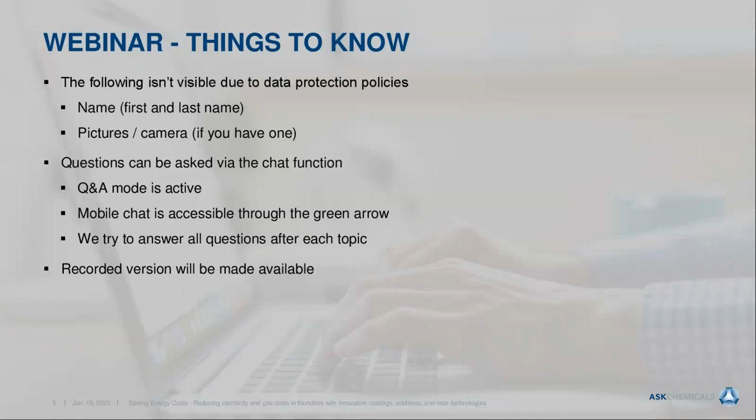A warm welcome from my side. We would like to structure the webinar in the following steps. First, I will tell you something about the rising energy costs and how energy is distributed. Then, how we can save energy in the coating process, followed by savings with additives. Later on, Imanol will tell you something about mini-risers and filters, and finally a conclusion.

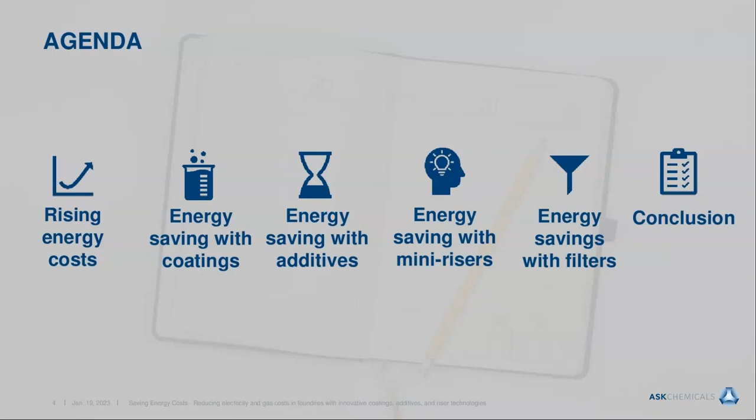What is the consumption of energy in foundries? Certainly, melting takes the majority of the energy. In iron and steel foundries, it's about 1,000 kilowatt hours per ton of molten metal. In steel foundries, we also have a big chunk of energy for heat treatment, which is about 500 kilowatt hours per ton. Furthermore, we have ladle heating, molding, fettling, etc.

In another literature, the total energy is reported split into electric power and gas. Iron foundries have a consumption of 900 kilowatt hours per ton electric power, whereas steel foundries have about 2,400. Gas consumption in iron foundries is about 40, whereas in steel foundries it's 10 times more, 350.

What about the core shop? For coating drying, when we have hot air convection ovens, we need a gas consumption of about 280 to almost 500 kilowatt hours per ton of sand cores, whereas if we have microwave drying, the electric power is only about 60 kilowatt hours per ton.

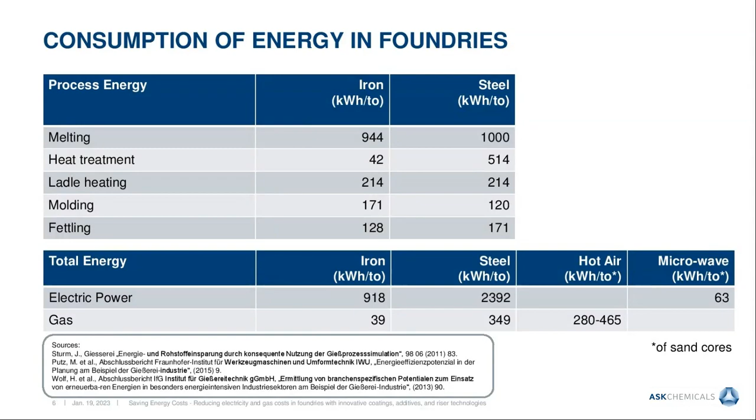What is the development of energy prices? If we look at electricity prices in Europe over the last 20 years, you can see that prices have continuously increased. But what is more frightening is really the gas prices, which exploded beginning in 2021, really through the roof. This is a big problem for all energy consuming industries, but especially, of course, for you as a foundry.

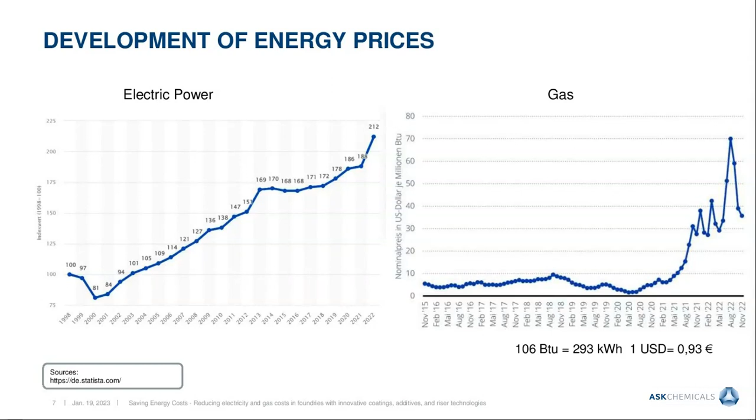But nevertheless, when a problem appears, typically the motivation and willpower increases to solve it, and there's light in the tunnel. There's a new process called ORC, Organic Rankine Cycle Process, where you can make use of your waste heat in the foundry. You have a heat exchanger where an organic component like ethanol is inside, heated up by waste heat from your melting shop or cooling station. This ethanol vapor pressure runs a turbine and produces electric power, with quite a high yield already of 17 to 20%.

So this is really good news, and the thermal yield is already at 60 to 70%. So you can make use of it for heating your buildings, running your drying oven, or even have a grid with your neighbors.

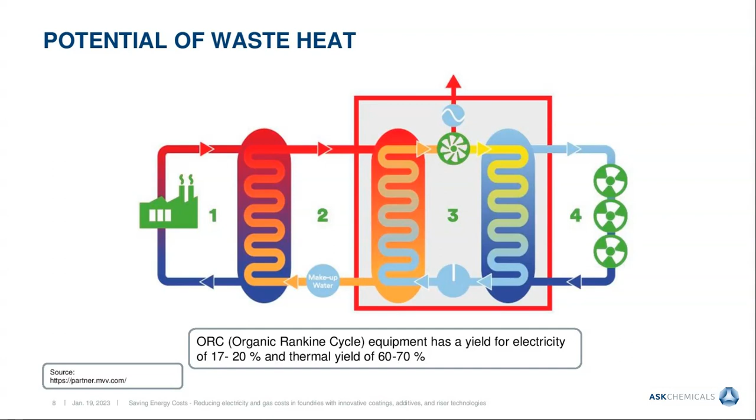What can we do in the coating drying process? The basic parameter for drying is definitely the sand type, which means the heat capacity and heat conductivity of the sand.

Furthermore, we have the coating solid content, which equals 100 minus water content. The higher the solid content, the less energy you need for drying. Also, the water retention of the coating matters: the less the water soaks into the sand, the less energy you need for drying.

Of course, the amount of applied coating is important, as well as drying temperature and time, air velocity and humidity, and the drying equipment, whether convection, microwave, infrared, vacuum, etc. We define performance as drying speed and energy cost per kilogram of coating, and this has to be optimized with the above parameters.

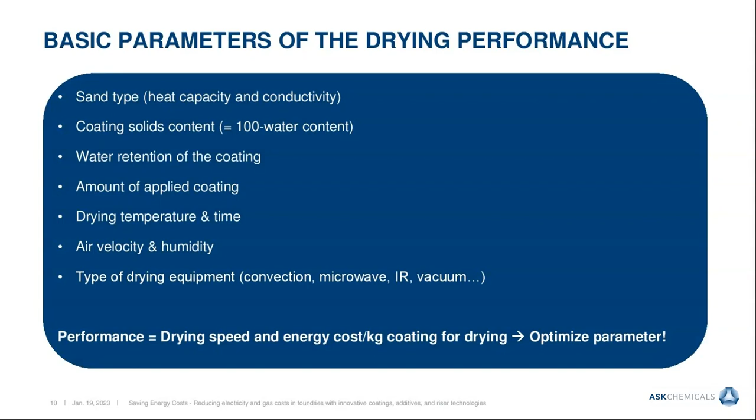How do we know that the coating is dry, which is very important for the casting result? There is equipment available typically used in the construction industry, for instance this Hydromette. We know that if the reading is below 40, the coating is good enough and dry enough.

Another possibility is to scratch off the coating after the drying oven, put this powder in a laboratory, and detect the remaining moisture with a drying balance.

There's another way, using a color-change moisture indicator. You see on the bottom left, the US coating, which is pink in the wet stage, changes to yellow when dry. So as soon as you have no more pink spots on your mold or core, you can be sure the coating is dry.

In Europe, we have a change from black to gray, which is also a very good indication.

However, you have to take caution. For instance, if you want to reduce your drying temperature to save energy, keep in mind that cold box resins often contain low volatile solvents, which then remain more in the core and may provoke gas defects. So in any case, prior to a decision, you have to do casting trials to avoid any trouble.

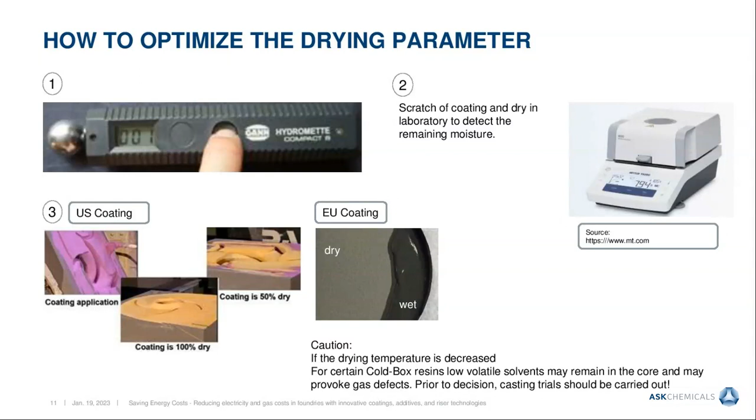Drying is a two-step process: heat exchange and mass transfer. Only as the water vapor is removed from the coating surface does drying continue and not stop. That means when you have low air humidity and high airspeed, the moisture is eliminated and you may be capable of reducing your drying temperature.

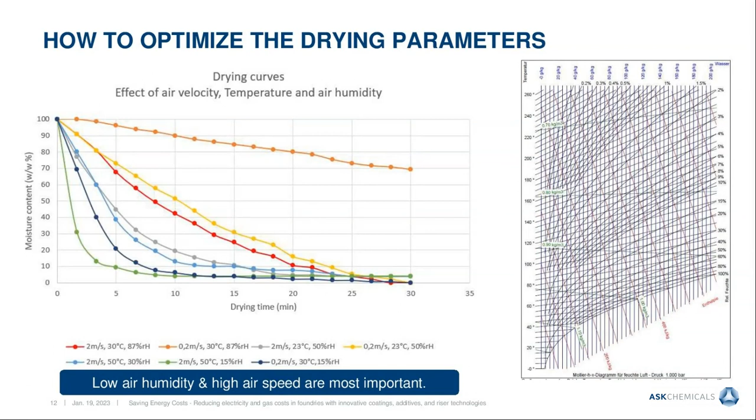On another part of the rotating desiccant wheel, hot air from waste sources like the melting shop or other sources is fed into the desiccant wheel, and the desiccant is reactivated. This has been shown to work really well.

We have an example of a foundry producing counterweights. They coat the mold with Solitec ST 801 at a temperature of 60 degrees with dehumidified air in only 20 minutes, and the heat, which comes from the melting shop, is for free.

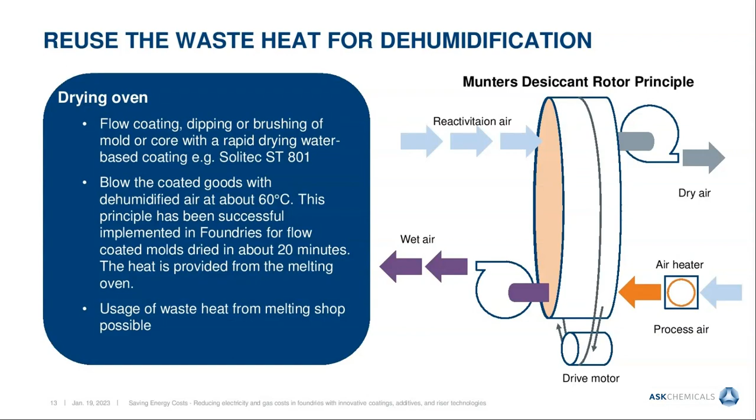This you can use to reduce, for instance, your drying temperature again and save energy, as already described. It has been proven that this fast-drying coating is even capable of substituting alcohol-based coatings in a drying oven.

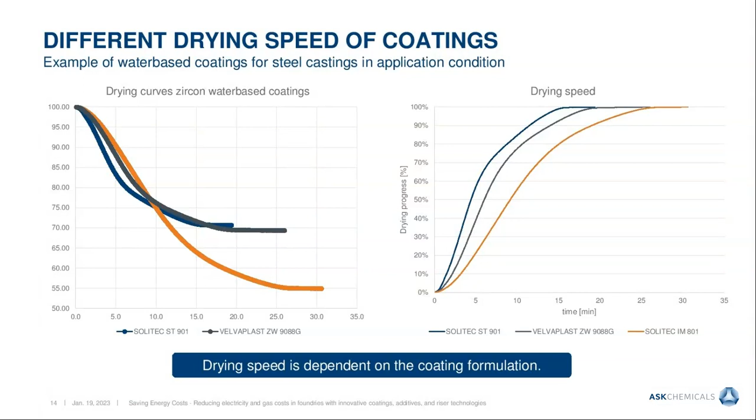What kind of different fast drying coatings do we have in our portfolio? On automotive iron castings, we have the Miratec TS520 and MB401. For inorganic binder systems, which are sensitive against water, we have the Miratec IBS 703. For iron No-Bake foundries, we have the Solitec HI 704 and WP 401. And for steel No-Bake castings, we have the already mentioned Solitec ST901 and the zircon-free ST801.

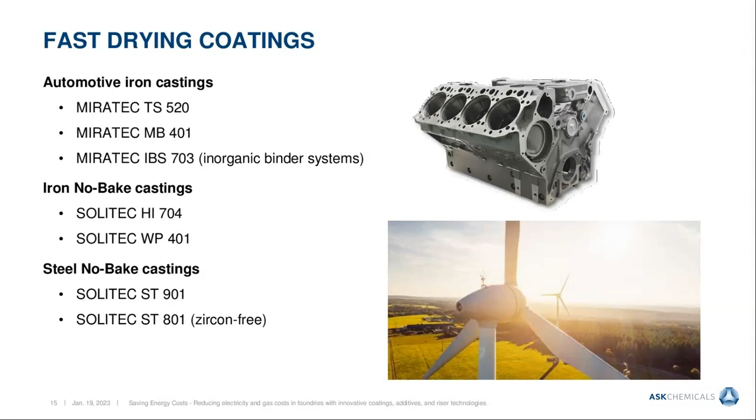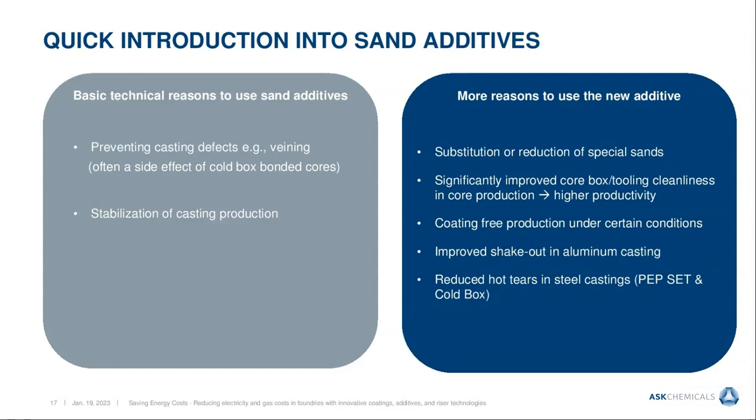What about eliminating the coating process in total? This we can do with sand additives. Typically, sand additives are used to prevent casting defects, for instance veining, which is often a side effect of cold box bonded cores, but also to stabilize the casting production in general. But there are more reasons for these novel additives. One of them is to have a coating-free production under certain conditions.

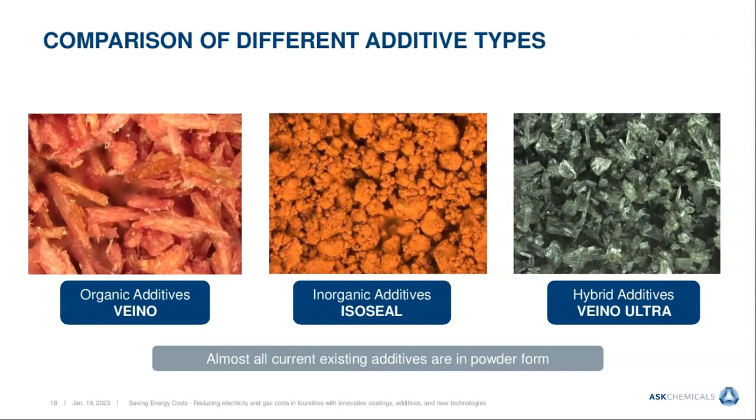There are different kinds of additives available: the organic ones, which we call Veino, the inorganic, which we call Isoseal, and the hybrid additives, which we call Veino Ultra. All of these have different feasibilities for application, some advantages, some challenges, also different addition rates. I would like to focus on the hybrid additives in this presentation.

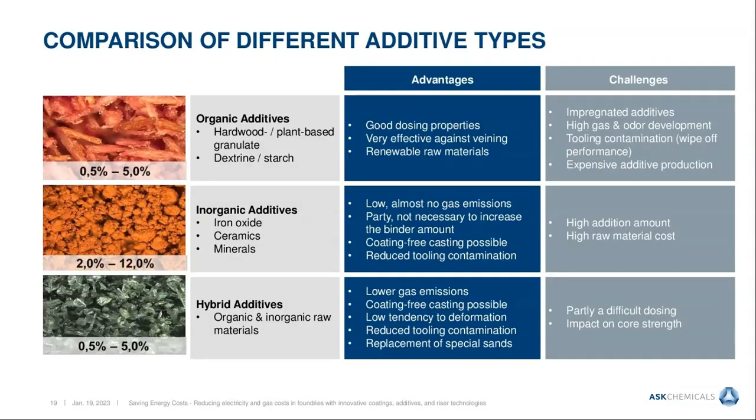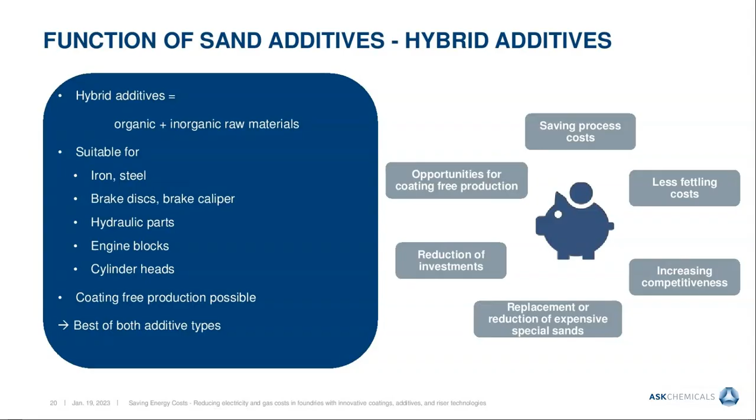Hybrid additives are a mixture of organic and inorganic raw materials, and they have a high cost saving in the process cost. They have the opportunity for coating-free production. By this, you can reduce your investments in maintaining or reinvesting in drying equipment, and you have the additional effect that you can replace or reduce expensive special sands. They are suitable for iron and steel castings, especially for brake disc, brake caliper, hydraulic parts, engine blocks, and cylinder heads. And I would like to show you now an example.

This is a ductile iron casting, a wheel part of a truck, originally coated, and we could eliminate the coating process by implementing the additive Veino Ultra. And even on gray iron casting, we were capable of showing that this concept works. Here's a housing of gray iron grade 250 with 120 kilogram weight, originally coated, and now the coating process has been eliminated by the additive EP4874.

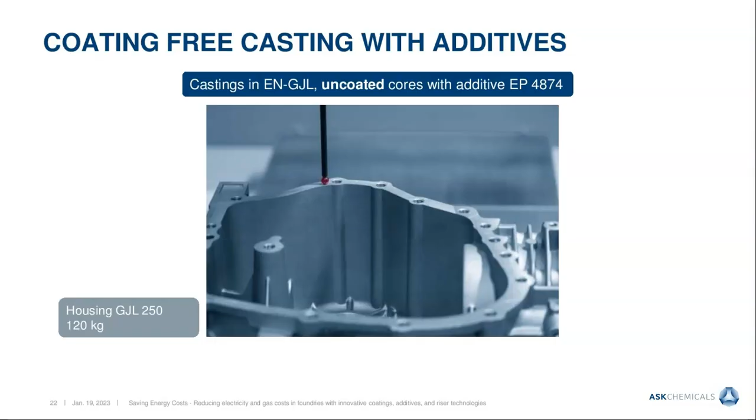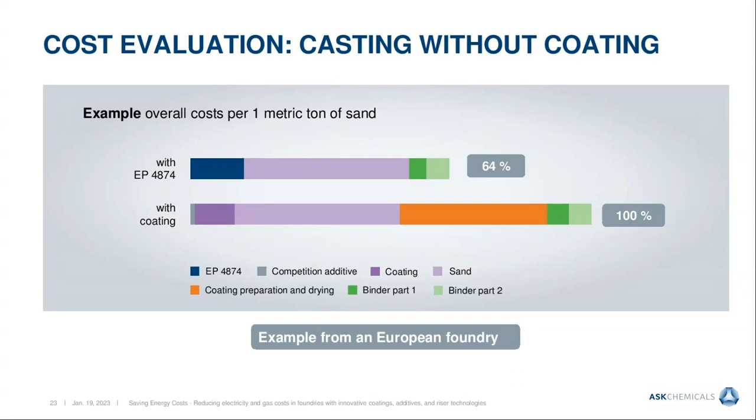I now hand over to my dear colleague Emmanuel.

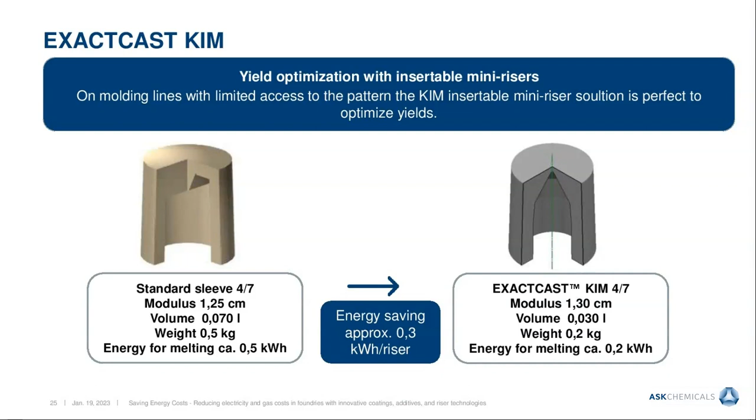This change of saving kilograms of metal inside the riser will also give us these energy savings. Approximately, when we change from a standard insertable sleeve 4/7 into a KIM 4/7, we can save approximately 0.3 kilowatt hours per riser.

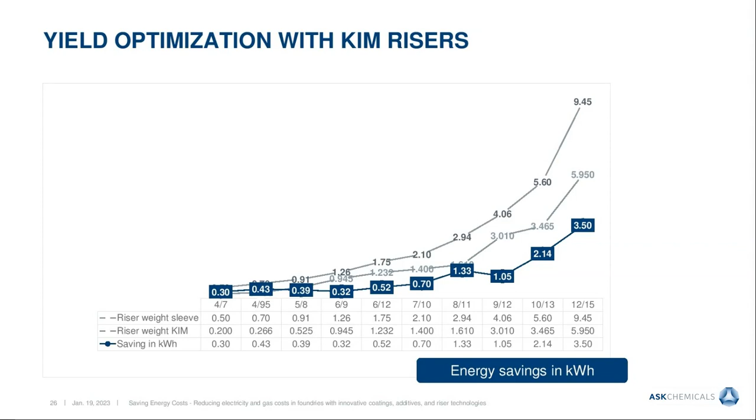If we look at these charts, we try to show all these comparisons between the regular insertable sleeves compared to the KIM version. In terms of weight, we can see in these curves the difference in terms of volume, weight, and also in terms of savings. We have to say that this reduction of volume in these risers always takes into account that we keep the module, so the performance is not affected by this change.

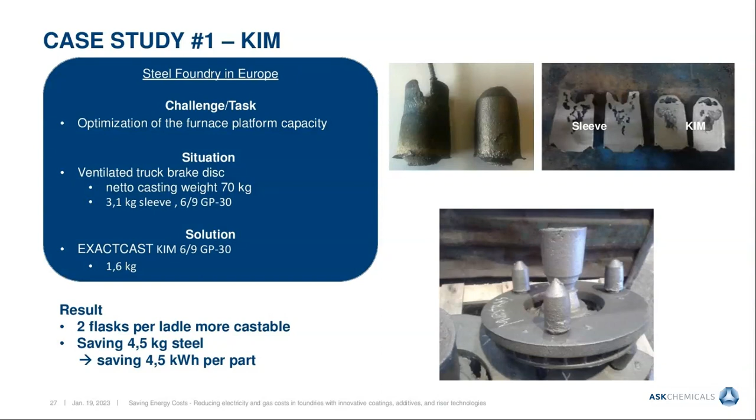Now we will go through some case studies, some examples to see how we can achieve these savings with different products. In this first example, we can see a KIM application in which, before the casting - in this case a ventilated truck brake disc - had insertable sleeve 6/9 with 3 kilograms per sleeve. Changing these risers into the KIM version with 1.6 kilograms each, they were able to save 4.5 kilograms per casting. So this meant 4.5 kilowatt hours of energy saved.

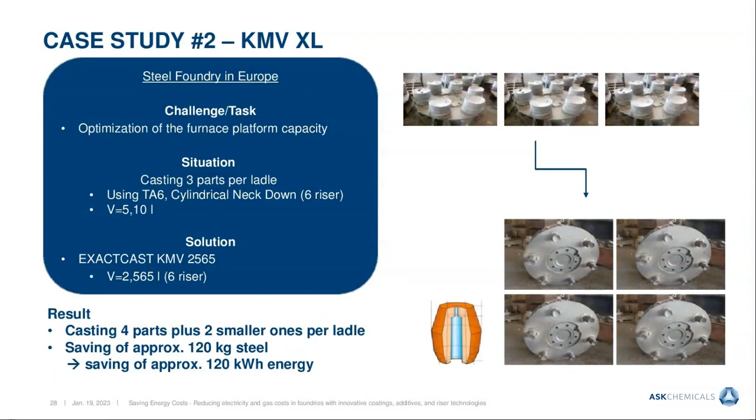In the second case study, we have a steel casting with an original design consisting of traditional fiber TA6 and cylindrical neck-down risers, 6 positions in each casting, with a volume for each feeding solution of 5 liters. The proposal from ASK was to use the KMV XL 2565 with 2.5 liters each, resulting in 120 kilograms of steel savings per casting. A good benefit for this customer was that with the same ladle, he was able to pour one more regular casting plus 2 small ones, so furnace capacity was really optimized. In the end, energy savings were also about 120 kilowatt hours.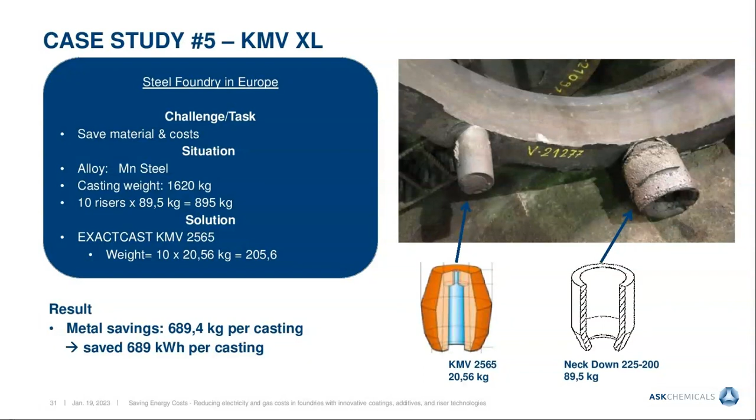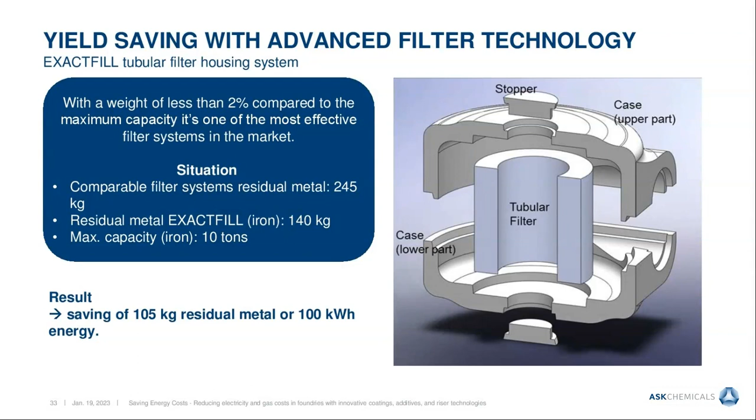Not risers, but now filters is also one of these top products that can help us reduce energy cost. We are talking now about the Exact Fill, a tubular filter, in which we can have big yield savings compared to other traditional filtration systems with similar capacities. We can have residual metal with this system of about 140 kilograms compared to traditional solutions that can reach up to 245 kilograms. These tubular filters can have a maximum capacity of 10 tons, and in the end we can save, apart from these volumes, also 100 kilowatt hours of energy.

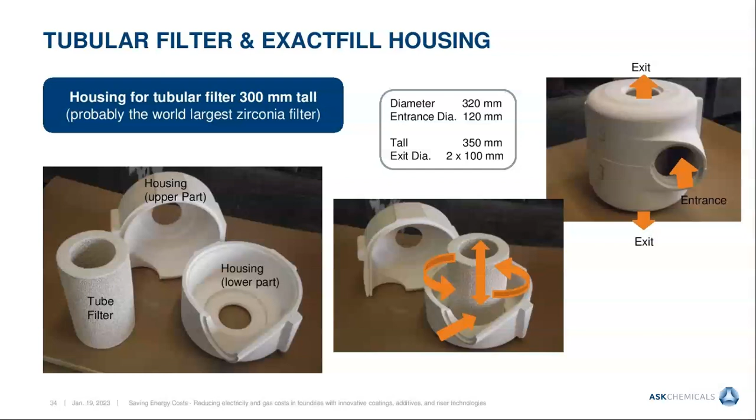Here we can see more or less the three parts that consist of an Exact Fill filter. We can identify the two parts of the housing, the upper and the lower part, and the filter itself. And we can see more or less the performance of it: we can identify one entrance, if you look at the picture on the top right side, and two possible exits.

So the conclusions of this webinar today about how to reduce energy with these products. Let's remember about coatings: we can reduce the drying time with optimized parameters and equipment, giving us savings in energy in these drying operations. Talking about additives, we can try to eliminate the coating process, especially for ductile iron castings of automotive components, and this will also give us savings. And talking about feeding systems, both risers and filters can help us improve our yield. We can also save some metal, and in the end, we save energy in the melting shop.